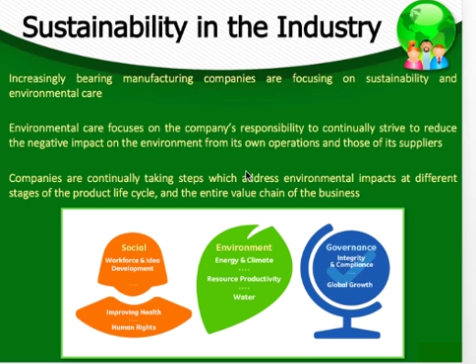Life cycle management allows companies to focus on the raw materials selected, how these are utilized and processed, the energy used by the products when running in customers' installations, and the way products are disposed of when they reach the end of their useful life.

Indian bearings market: the bearings industry in India is heavily dependent upon imports as the major players are global entities which import the majority of products from their global manufacturing units located abroad. India is largely regarded as among the fastest growing markets for bearings in the world, which has led to a number of multinational companies emerging in the Indian market such as Timken and FAG Bearings.

The Indian bearings industry is currently quite bullish with excellent growth prospects owing to a spurt in growth of the automobile and industrial sector, which has given substantial rise to demand for bearings. The top players in the bearings market can be listed as FAG Bearings, Timken India, NRB Bearings, and SKF India.

A major portion of the bearings market in India is unorganized, catering to the low-end replacement market. A significant percentage of bearings are imported from countries like Japan, Germany, Singapore, China, France, and Italy. Demand for bearings is derived from two key user segments, the automotive and industrial sectors. The industrial market is larger than the automobile market in value terms.

Total exports of bearings declined in both value and volume terms in 2012-13 compared to the previous fiscal year. The slowdown in exports was on account of the recent crisis in the Eurozone and global recession. The Indian bearings market is characterized by challenges like counterfeit spurious products, rise in prices of raw materials, and growing cost pressure on Indian suppliers.

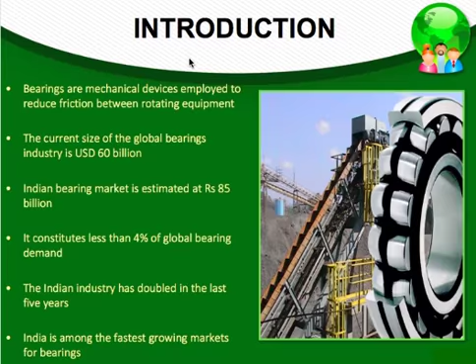Now coming to sustainable practices in FAG Bearings: India uses VRF-based water-cooled air conditioning technology in central air conditioning, energy-efficient air-cooled medium-pressure compressors, LED lights in street lights and production areas, high flashpoint washing fluid in place of low flashpoint washing fluid to reduce consumption, FRP blades in cooling tower fans, and high-speed centrifuges for separation of oil from industrial effluent. Trials have been successful; air-cooled compressors are being installed and water cooling technology is being replaced, thus saving natural resources.

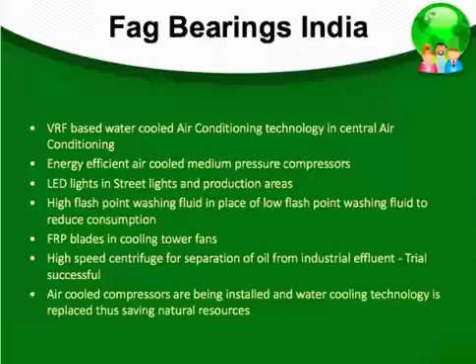In India, it has established the Ethisphere Institute, dedicated to the creation, advancement, and sharing of best practices in business ethics, corporate social responsibility, anti-corruption, and sustainability. It supports environmental sustainability through pollution prevention, waste management, recycling, energy conservation, and energy saving product innovation in friction management and power transmission.

Timken is dedicated to working green and follows practices such as a comprehensive plan to handle rainwater that falls on site, vegetated swales within parking areas to slow rainwater so it can be absorbed into the ground, a white roof combined with high efficiency heating and cooling components that save 32% on energy usage compared with a code-compliant building without green features, low flow water fixtures, and abundant natural lighting.

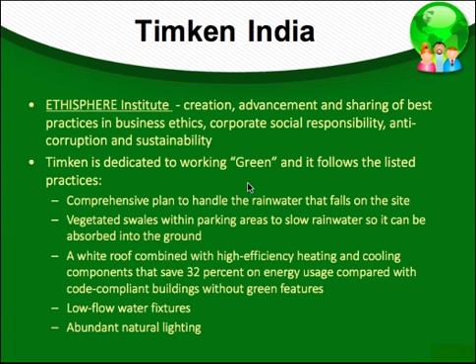Now we move to the next section, the global bearing market. The global bearing market is generally seen as the worldwide sales of rolling bearings, comprising ball and roller bearing assemblies of various designs, including mounted bearing units.

The market grows around 0 to 1% year on year. Sales through distributors maintain around 30% of world bearing demand, of which around 25% is related to the vehicle service market and around 75% to the industrial market.

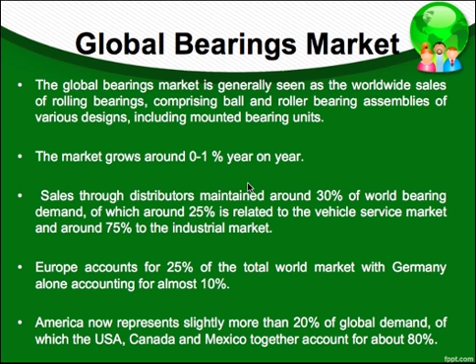Europe accounts for 25% of the total world market, with Germany alone accounting for almost 10%. America now represents slightly more than 20% of the global market, of which the USA, Canada, and Mexico together account for about 80%.

Here we'll look at power generation from renewables, as to what the global companies in the bearings industry adopt based on the renewable sources of energy they use and how they use it. We'll look at a few statistics of the power generation adopted by the global companies.

As you can see, in Germany the power generation has varied from 17% to more than 35% in 5 years, and similarly in UK, Italy, France, Brazil, US, and China. So the power generation through renewable sources of energy has been increased rapidly.

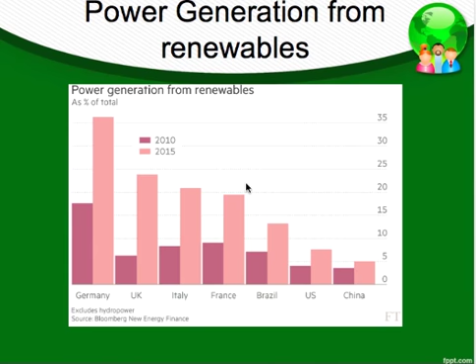We'll look at SKF Global, which is the industry stalwart in the bearings industry. The focus of SKF's technology development today is to reduce the environmental impact of an asset during its life cycle. It integrates environmental life cycle thinking into the product development process. Weight, recyclability, biodegradability, and many more factors are taken into consideration while designing the products.

They have deployed the ISO 14001 environment management system across all their factories located in 30 countries to reduce the carbon footprint in their operations. They have also adopted various measures which have resulted in a reduction in CO2 emissions by 5%, a 50% reduction in volatile organic compound emissions, and an 80% recycling rate of grinding swarf, which is a major component in bearings manufacturing. Overall usage of water has also been reduced.

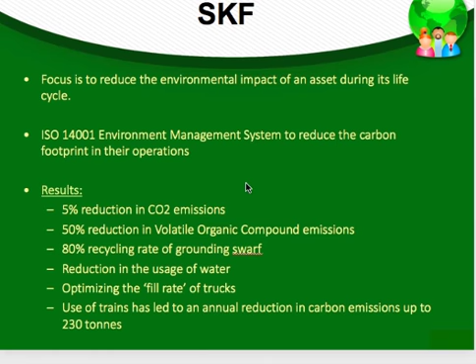SKF Bearings also constantly strives to reduce the carbon footprint in the logistics process by adopting more environmentally friendly means of transportation. This has led to optimizing the fill rate of trucks and use of trains, resulting in an annual reduction in carbon emissions of up to 230 tons.

Here we'll look at the very famous SKF Beyond Zero project, which has become an industry standard and has also been adopted by a few of its competitors. So what exactly is the Beyond Zero project?

The Beyond Zero project has its merits in that it has helped SKF produce energy efficient bearings. It has also helped them in mechatronics, welding robots, actuators in window facades, by-wire auto throttle in aerospace, and it has helped them in reducing carbon intensity as well as energy intensity.

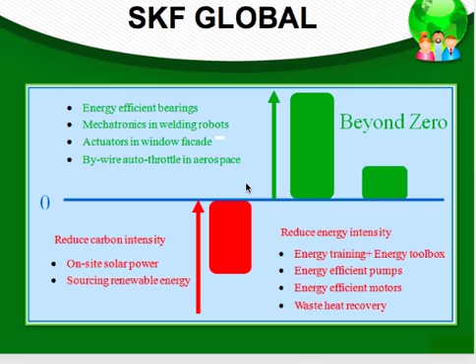We'll look at another company named NSK Bearings, which is also a famous name in the bearings industry. NSK Bearings' actions include open communication about their environmental goals, which will hopefully encourage other manufacturers to recognize the economic and human benefits of smart, sustainable practices.

The implementation of a material compliance application, which tracks regulated substances within NSK products and purchased products against national and global environmental standards, has also helped them.

As a member of the US EPA WasteWise program, NSK has accomplished a few achievements, which are as follows: it has approximately helped them save the equivalent of 27,000 trees, 757 million gallons of oil, 11 million gallons of water, 39,000 gallons of gasoline, and 6 million kilowatt hours of electricity. These are the energy consumption figures as well as the reduction in energy it used to consume before.

It has also adopted ISO 14001 compliance certification, as well as other measures which have helped them in lubricant grease, and achieved the highest international standards for safety, also registered as NSF category H3 lubricant.

Coming to the Schaeffler Group, Germany, the motive of the company is to adopt the best environmental practices through continuous innovation and building compact, energy-efficient products, which helps their business model as well as drives sustainability forward. Innovative engineering solutions from Schaeffler are helping manufacturers.

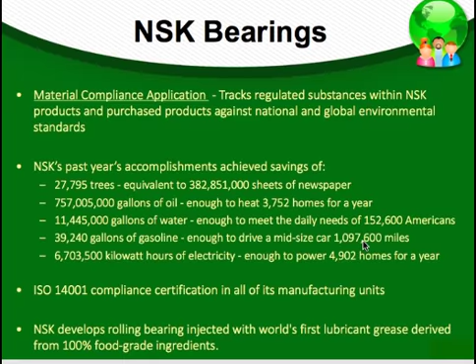Now coming to the comparative analysis of the global and the Indian standards followed by the previously mentioned companies, we will look into 5 criteria: quality, environment, energy efficiency, safety of machines, and functional safety.

As you can see, all the global companies follow ISO standards. For example, for quality they follow ISO 9001:2008 quality norms, and for environment they follow ISO 14001 norms.

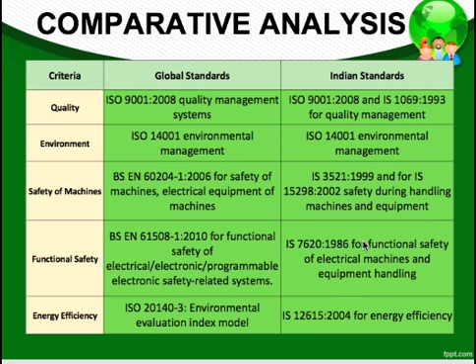But most of the Indian companies are basically subsidiaries of their global parent companies, because of which the specifications they follow are almost similar to those followed in their parent companies, but they just follow the corresponding norms present in the local Indian standards.

Coming to the conclusion, we can see that the bearings industry is dominated by the global players, and there is still a long way to go for sustainable practices to be implemented in India.

So thank you for bearing with us, and before going I would like to share a quote from Mr. Bjarke Ingels: 'Sustainability can't be like some sort of a moral sacrifice or political dilemma or a philanthropical cause. It has to be a design challenge.' Thank you.